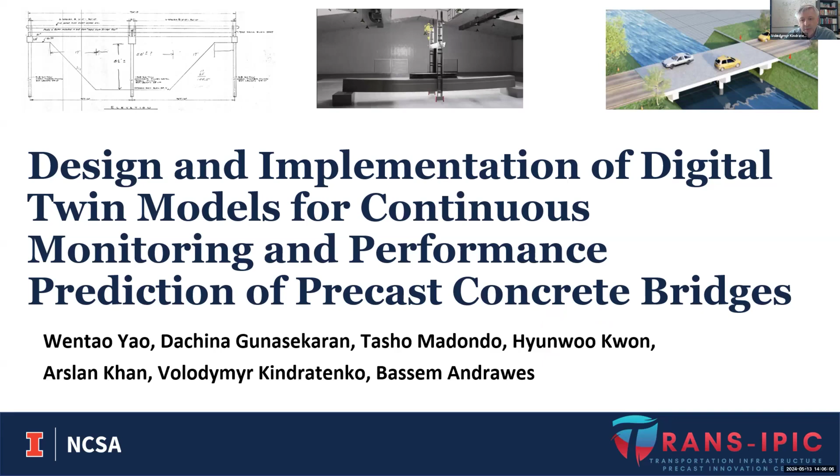I work at NCSA, as Professor Andrawes mentioned. And so this project is on designing and implementing digital twin models for continuous monitoring and performance prediction of precast concrete bridges. And this is really closely related to the work which otherwise is typically carried out in these high performance computing centers, where we are interested in running these complex simulation models on complex computer systems.

I should point out that this is a joint effort. So Professor Andrawes is also a co-principal investigator for this project. And we have a group of very capable and talented students who have been doing quite a bit of work. I should point out specifically Wentao Yao, who works with digital twin models. Dachina from Professor Andrawes' group, who works with actual bridges and actual physical modeling and simulation.

And also Tasho Madondo, who helped quite a bit with modeling, and also Hyunwoo Kwon, who is another student who worked on helping with building the simulations and bringing them into the digital twin models setup. And also Arslan Khan. Arslan is a new postdoc in Professor Andrawes' group, and Arslan came just recently, but he really became a very integral part of this project. He is very knowledgeable and helps students quite a bit to do what they're supposed to do.

Okay, so when we proposed this project, these were kind of our overarching goals. One of them was to design and validate a digital twin model of a precast concrete bridge structure, and also subsequently integrate this model with sensor data which is coming from the real world. And we had some ideas about where that sensor data might be coming from and what we can do with this. But the overarching idea was to merge these two things.

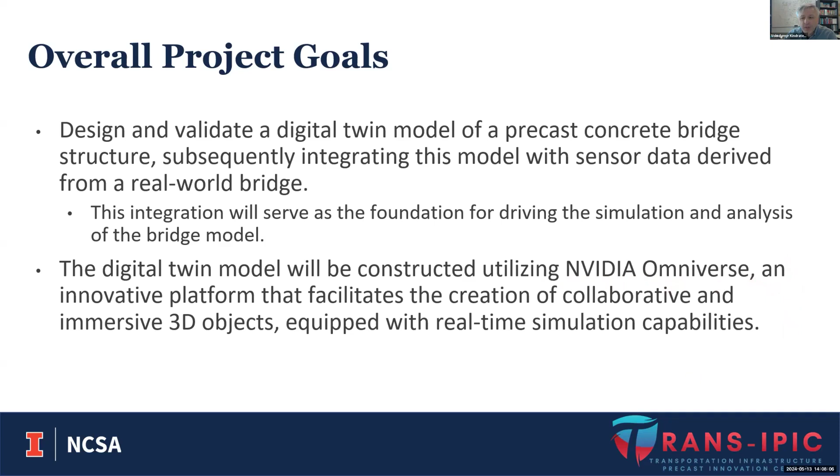And then another idea that we had was that we also wanted to play with this new platform developed by NVIDIA called Omniverse. We heard a lot about capabilities of this platform to enable building digital twin models for very complex processes and systems. And we wanted to investigate how exactly this will work, and if there are any advantages or benefits of this platform compared to other tools that are traditionally used in this space.

So our research plan consisted of essentially three main topics or directions. One of them was essentially to build a digital model. We wanted to explore how to use technical drawings and any sort of documentation available to very quickly build models. And the key idea here was that because these bridges are built from precast parts, there must be some sort of standard set of these precast parts that we can implement, and then we can rapidly assemble real bridges from them.

Another item on the research plan was how to use the NVIDIA Omniverse platform. So how we can bring these precast components into this environment, how we can rapidly assemble something from them, and also how we can connect it to the external world. And presumably the Omniverse environment was supposed to give us the ability to connect with data coming from the real bridges, as well as potentially data coming from simulations or observations of other kinds.

And of course, the bridge analysis and simulation using real-time data. So once this platform is set up, once we develop all these building blocks, how we really link it together with the environmental data, with the data available in the databases, with the simulation data, and how we can build basically a data-driven digital twin model such that it really reflects the real bridge structures. So this was the overarching plan.

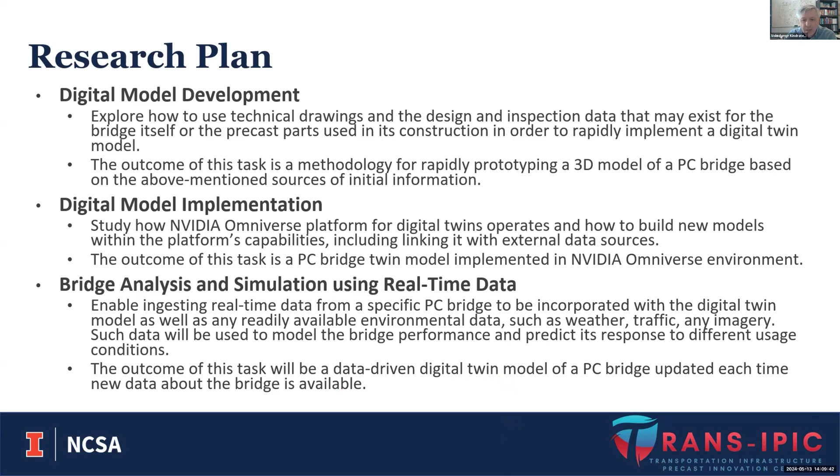A few words about the digital twins. So a digital twin model is a digital representation that simulates a physical object throughout its life cycle. So given a real building or a real bridge or a real object, we build a virtual model. This model would have to have a similar appearance in some sort of a virtual world, but more importantly, it would behave in the same way as the real object.

If something happens to the real object, it would be reflected on the digital twin model so that we can observe it inside of our virtual environment without the need to actually go and inspect the real bridge or real object. And so in the context of bridge monitoring, the digital twin includes basically a virtual model that reflects the real-time data of the bridge's physical structures.

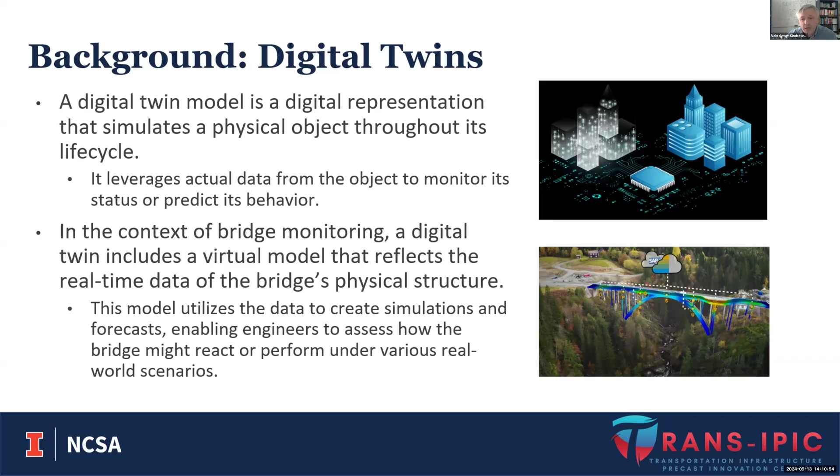If there are some sensors that measure something about the bridge, we want these measurements to be reflected in our digital twin model, and at least the data be examined on the digital twin model. But better yet, if the data can drive the sort of evolution of that model.

A few words about the Omniverse. I already mentioned why we wanted to use Omniverse. This is a new technology that was recently developed by NVIDIA, and it really capitalizes on the best GPU hardware that is available at NCSA in particular. But more importantly, the platform was originally designed as a platform for building digital twin models for all kinds of purposes.

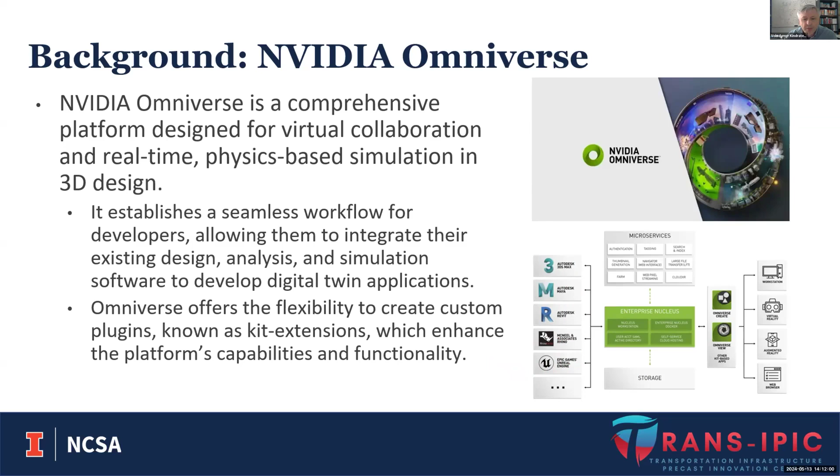The most important part of what it has is the ability to build these plugins that enable to bring in external data, that enable to connect data feeds with the virtual models, that enable to direct or apply changes to the virtual models in response to the real data. And not only real data, but these plugins could also connect to simulations, very accurate physics-based simulations that can also be reflected in this environment and so on. And so that's what's special about this platform. That is kind of an emerging platform in this field.

Okay, so let's talk about our plan, and then the work that we have done as part of that plan. So we started with these drawings that look like this. We got a whole collection of bridge drawings that look like that, and so we spent some time trying to understand what they are. But at the end of the day, all these precast concrete bridges are built out of some sort of well-defined construction pieces, where concrete is poured somewhere else, but they are brought in place at the time of the bridge construction. So these are examples of basic beam components, which we modeled based on these drawings.

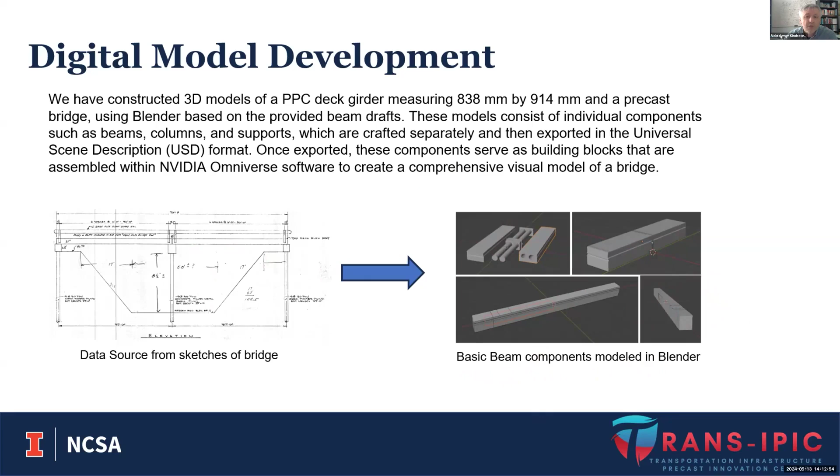So we have to build these models, obviously, but once they are built, we can actually then go and assemble them in our virtual environment to build one or another bridge. So we started with manually building this bridge, where we also applied all this texture just to make it look pretty. But at the end of the day, our goal is to be able to programmatically build these bridges. So for example, we can go to a database that tells us that this bridge consists of so many beams of that size, arranged in this particular configuration, and we want to be able to read that information and programmatically build it on the fly.

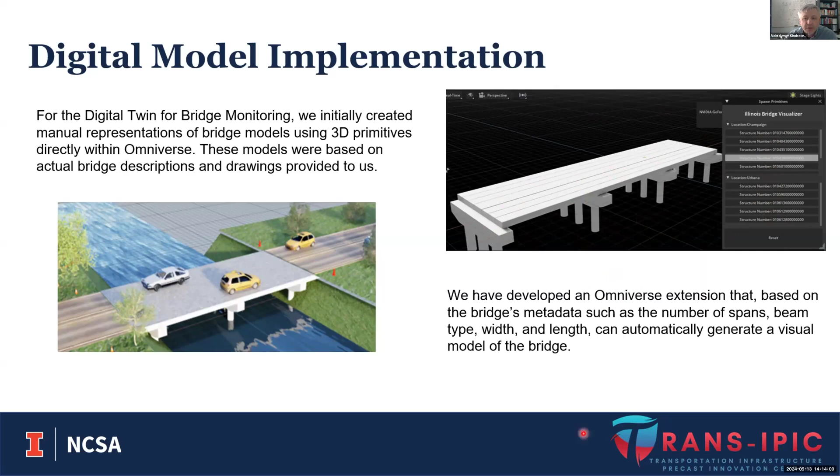Yeah, and so we built the plugin to Omniverse that enables us to query a database with information about bridges, and then we can programmatically pick a bridge, and the actual geometry of that bridge will be assembled on the fly inside this virtual environment. And so that's what we were able to accomplish with the help of the Omniverse environment, just by building these plugins that can read databases and sample bridges.

So once we've done that, we also started to look at how we can incorporate data from other databases. For example, if there is some sort of inspection database where somebody came and looked at the bridge and recorded some values, we wanted to be able to pick up the data from the inspections and visualize it in some ways. And so we found the NBI database, and in that database we found information for different types of performance evaluation and inspection. And we were able to connect to the database for specific regions and pull out this data and show historical plots, as well as any pictures that have been taken from that area of the bridge.

If they are available and stored somewhere, we can also pull them in, and you can visualize them in this virtual environment. So the idea would be that a user of the system can pull out a particular bridge, build a virtual model of this bridge like this, and then go to the relevant databases and pull out the relevant information about the bridge that was collected over time, and visualize it there as well. And so you could kind of do virtual inspection of these structures in your office.

All right, but then the other question was, how can we connect this with real-time data? And actually, where do we get that real-time data? And what is that real-time data? What is it that we could potentially collect?

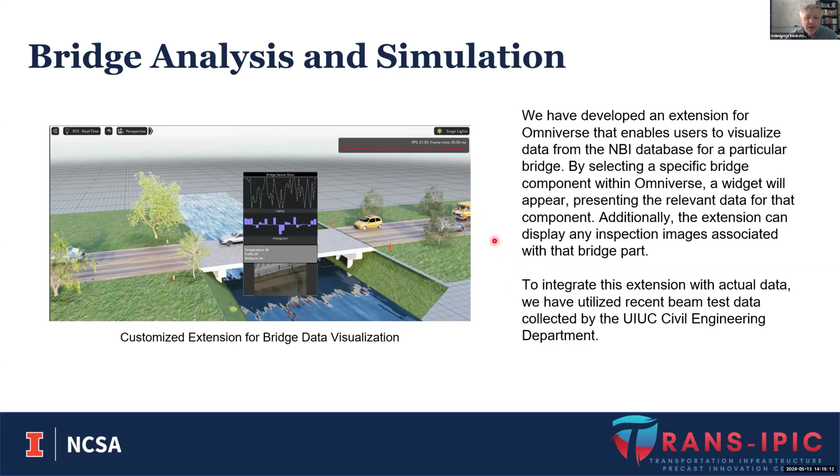So in order to do that, we started to look at how bridges are tested, but more specifically, how these tests are done in the lab environment. And we were lucky that Professor Andrawes' team was preparing to run yet another test of a beam in the lab, and so we decided that we would really like to collect the data during the test and build a digital

twin model of that beam and learn how to integrate the data that comes from this sort of test, but also understand what the data is and how we can use it in our digital twin model for bridges in general, and what else we can do with this data to drive the modeling and simulation tests. And this test took place a little bit more than a month ago, I think.

And this is the stress test where a load is applied to this large beam, and the beam eventually gets bent, cracks develop, and eventually it collapses. And so we set up an additional set of cameras so we can collect some data from this experiment, in addition to the data that is already collected by the team.

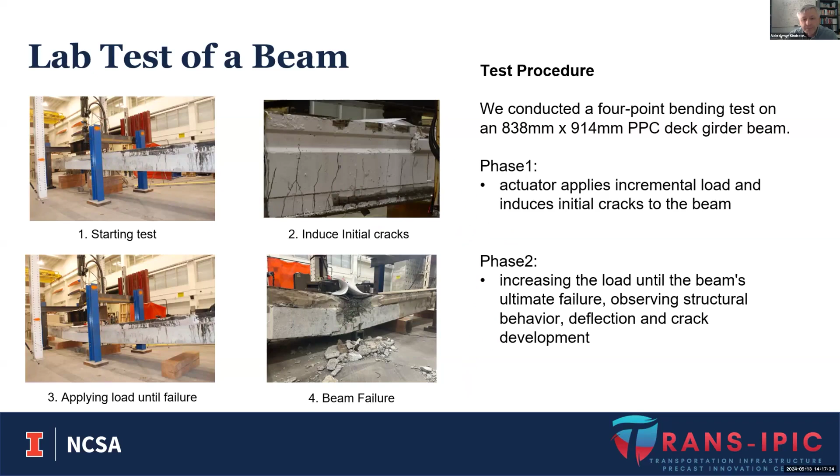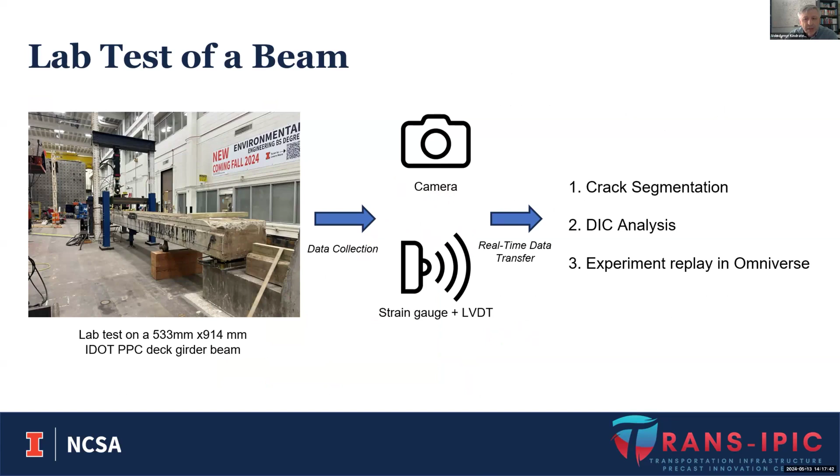And we can then use this data to be reflected in our virtual model. So the data that is collected from our point of view is the data from cameras, and we can extract quite a bit from there. And then there are also other types of data that were collected by the team that could also be used for other purposes.

And eventually, we were able to build a virtual model of the beam in our environment that looks like this. This is a simplified version of the test environment, but the beam actually has all the main characteristics of the actual physical beam. And so there is this virtual load which is applied to it, and there is a deformation that happens here.

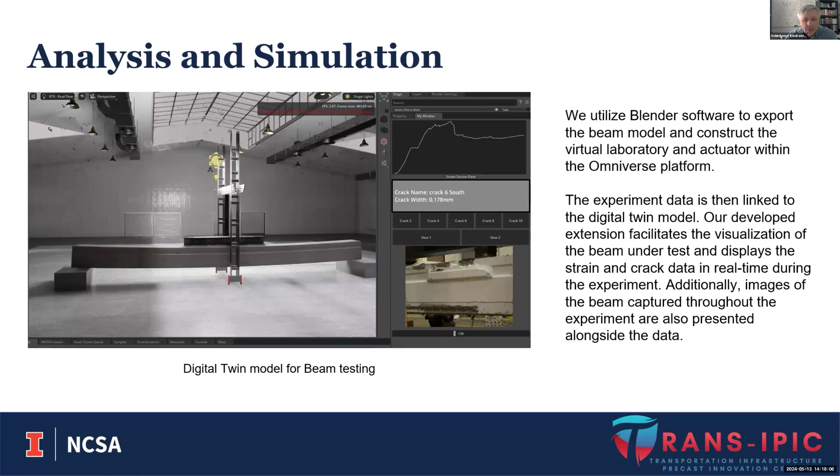And so here, let me go to the next slide. So there is an animation somewhere here. Let me see if it will work. Yeah, there's supposed to be an animation. I don't see it playing, but maybe it will start playing a bit later.

So the idea here is that as the load is applied, there is a deformation, and a user can actually see as a function of time how much load is applied, what the readings of the sensors are, as well as see pictures that were taken. We were taking pictures every 30 seconds. So at any given moment of time, you can see how the actual structure of this beam looks.

And so through this, we were able to enable navigation in time, so the operator or the user of the system can actually go back in time to see what happened before and go forward in time. And so this model is there, and it is working now. So yeah, here we go.

So there is this animation that just started. As you can see, as time goes by and the load is applied, there are some deformations and there are pictures which correspond to that, and so on.

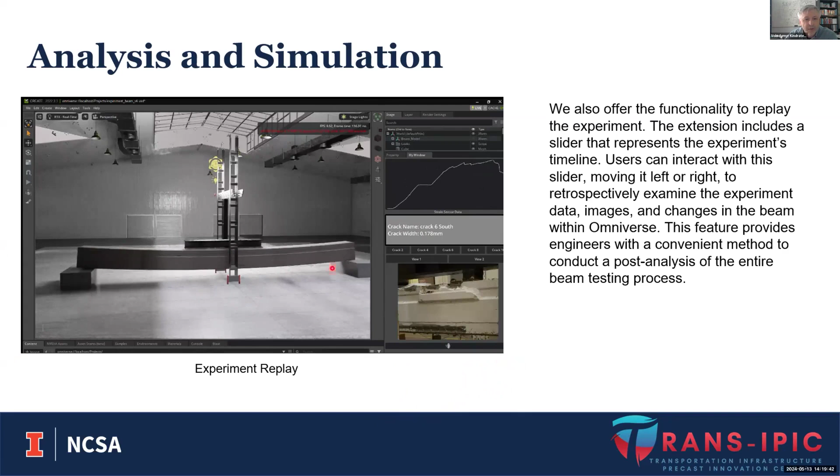Now, this is just a visual representation, and we very quickly understood that the accuracy of this is just some visual resemblance, but it doesn't mean that this deformation happens exactly like it's shown here. So we started to look into how we can actually model this with finite element analysis tools.

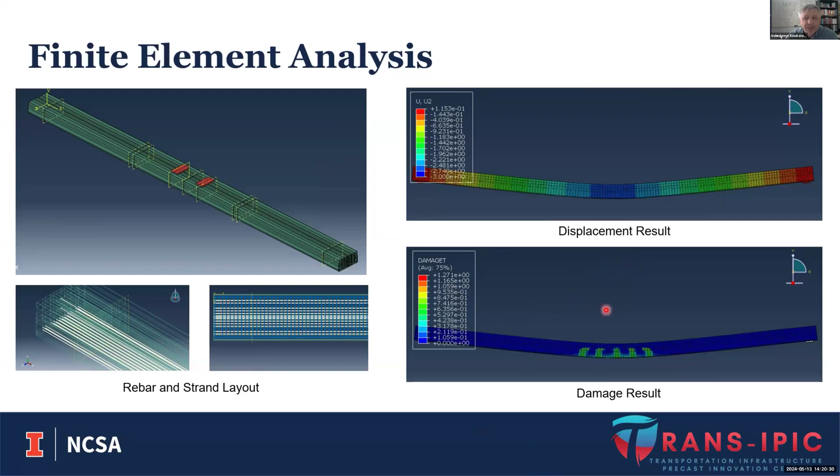So one of our students built a model for this bridge, or for this beam, and then started to apply some forces in a particular location and model this to sort of reproduce the process of the actual deformation in this virtual environment, and then export all these geometries from this tool into our Omniverse environment, so we can actually visualize what really happens there more precisely and more accurately, so we can build a more accurate bending model.

So the simulation was done in Abaqus, and then the geometry was exported into ParaView, and then from ParaView, with the help of plugins available in Omniverse, we were able to bring this geometry back into this virtual environment.

Now, of course, there are some aspects of this that are still somewhat problematic. For example, these finite element method simulations, depending on the accuracy required, are time consuming, so we cannot necessarily run all of this in real time or in the time frames that we are interested in. So there is some more work to be done to get this to work faster.

But anyway, we could bring the actual physics-based simulations into our virtual environment as well, and be able to sort of simulate performance of these structures and visualize this performance in this environment. We also look at the cracks.

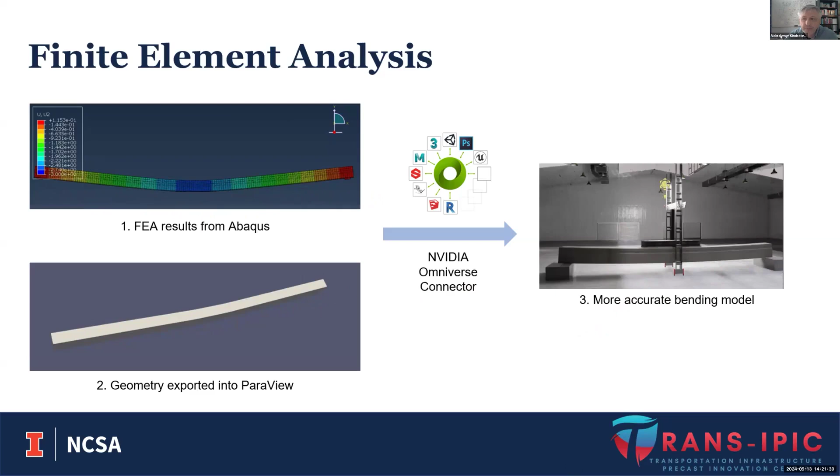This summer, we want to go back and re-evaluate this a little bit more and build the software, or models actually, perhaps machine learning models, that can extract these cracks from the moment they start to form during the experiment. And so we can actually measure the thickness of cracks, their length, and perhaps something about their geometries from the beginning of the experiment, and sort of compute how these cracks behave with higher loads.

And so our idea here is that given the load, we want to get some sort of a model, some sort of an idea how these cracks can be created, but also given the cracks, so taking a picture of an existing beam, we also want to get some ideas about how much load must have been applied to the beam so that this particular type of cracks formed. So we want to use this data to develop models to study this phenomenon both ways.

So I guess there is an animation somewhere here as well. Yeah, these animations are pretty heavy.

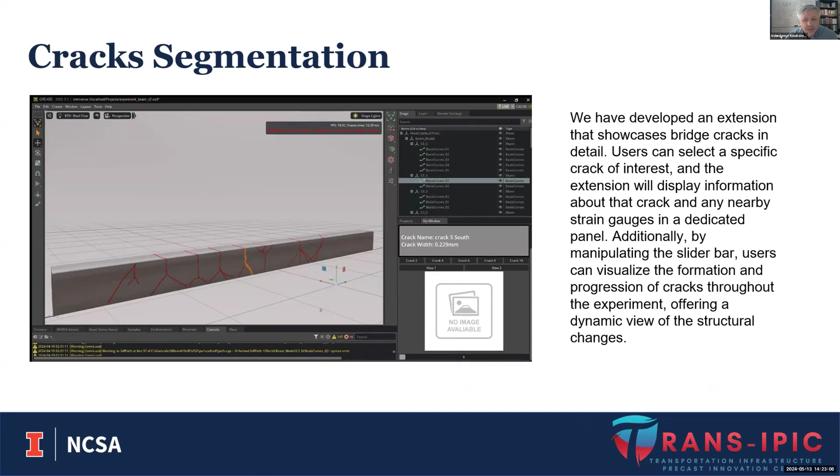Yeah, and so we've been also working on developing this software. So we started to apply some machine learning models that can be used to extract cracks from pictures that look like this. And this is not exactly precise yet. We need to spend more time on developing this software.

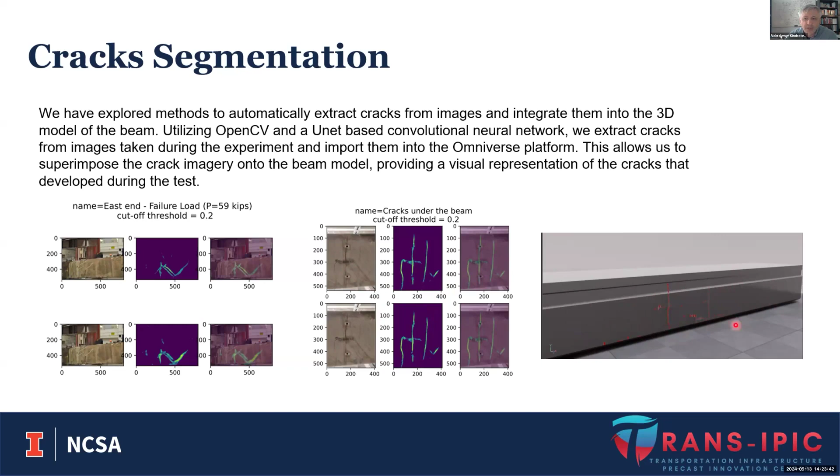But nevertheless, we are able to extract bigger cracks relatively accurately, and we are able to superimpose these cracks on top of these geometries in our Omniverse environment so that they can be visualized. And our goal is eventually to get this to be visualized essentially in real time as the experiment continues. So, with that, this is what we have done.

We investigated different technologies needed to build these virtual models or digital twin models of precast concrete bridges, and we identified the challenges as well as opportunities in building these models and what they can be used for.

So our plans for this summer are to process the data set that we have collected in this past experiment, and build a data set where for each of the pictures that we collected, we can also get all of the measurements of all of the forces that were applied to the beam and any other descriptive information that is available, so that we can establish a connection between the crack propagation and the amount of load applied, and then try to build models for this.

And also, we are interested in spending more time on improving the performance of finite element analysis methods. Perhaps we can look at running these computations on a high-performance computing system, so that we can get results much faster.

And so we could, for example, run a finite element analysis model during the time of this beam test, and if we can predict accurately in real time what is going to happen to the beam, and also be able to visualize this in real time, so that users can observe the virtual experiment in the digital twin model environment while the actual real experiment is taking place, together with the analysis and prediction that is computed on

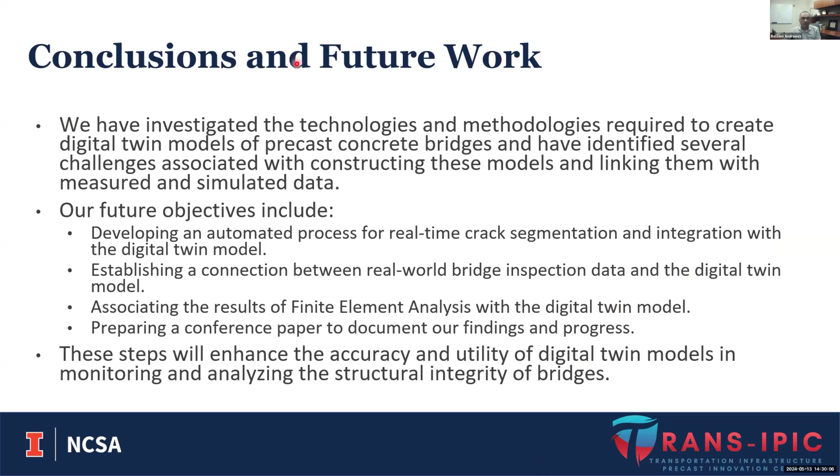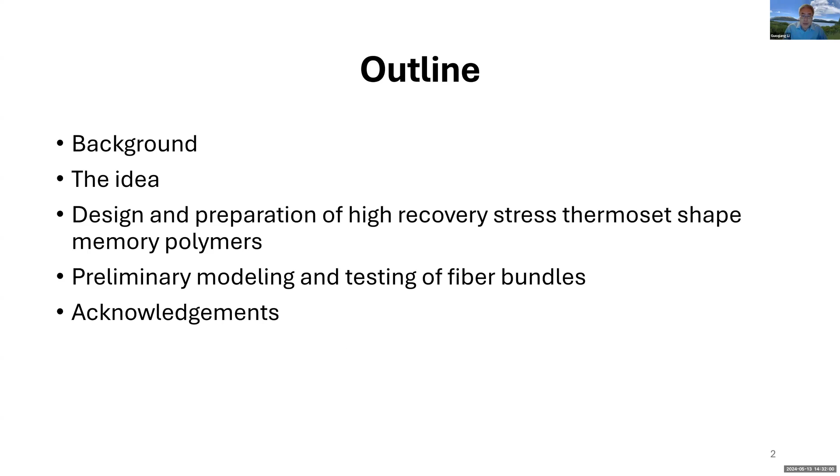Okay, background. You know that fiber reinforced polymer or FRP rebars have been used in repair, rehabilitation, reinforcement, and reconstruction of concrete structures. In the literature, people also call it 4R. We know the advantage of FRP is that they're lighter and also corrosion resistant. And we believe that FRP rebars can be further improved by using smart polymers. So here we are talking about shape memory polymers.

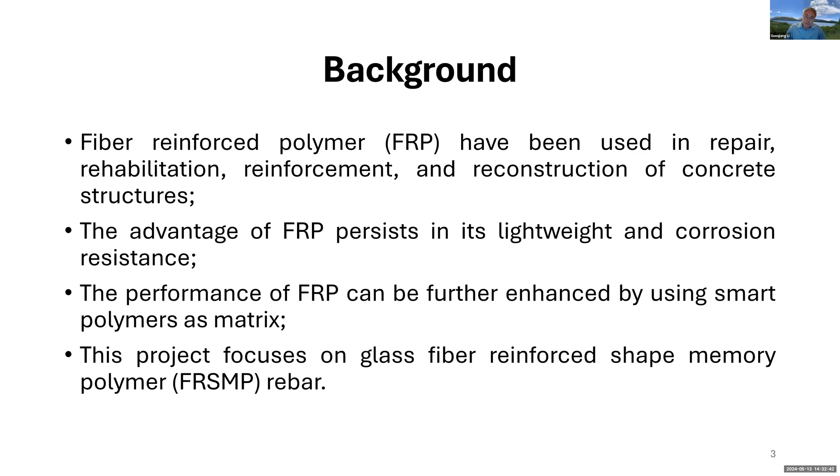Assuming during service you create a crack due to bending or other type of stress. Now, by triggering the shape recovery process, because this initial length of the rebar is after the pre-stressing, this longer rebar tries to go back to the original length, which means the rebar tries to shrink. When it shrinks, it will bring the crack in touch, or at least narrow the crack. So the rebar is not only a load carrying device, but also a functional device to help close cracks. If the cement concrete is self-healable, then the crack can be self-healed. So that's the major idea.

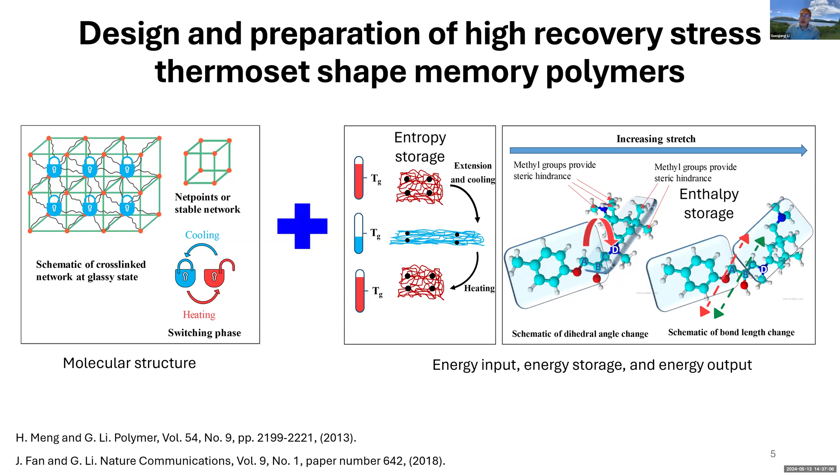Another mechanism is enthalpy storage, which is through chemical bond length change and bond angle change. If you recall the Gibbs free energy equation, both entropy and enthalpy are able to contribute to energy storage. Actually, we rely more on enthalpy storage. The reason is that in the past, people basically relied on entropy, and the recovery stress is very limited. So we proposed the idea of enthalpy storage, and then we started to make new polymer networks. Here I show you one of them.

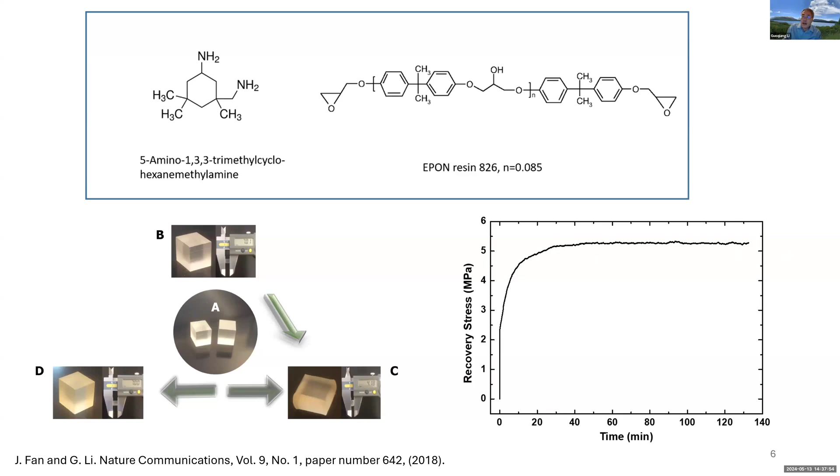This cross-linker and this monomer, when they form chemical cross-links, make a new thermoset shape memory polymer. Here we are showing the recovery stress testing. You can see that after about 6% tensile programming or tensile pre-stressing, we have about 5 MPa recovery stress. If you just depend on entropy storage, the stress will usually be less than 1 MPa.

So we also tried to see if this idea is universal or not. So basically what we did is that we used molecular dynamics simulation, and then we also used solid mechanics modeling, and we compared the modeling result with the experimental result. We found that yes, this idea is correct. The bond length change and bond angle change indeed can store the input energy.

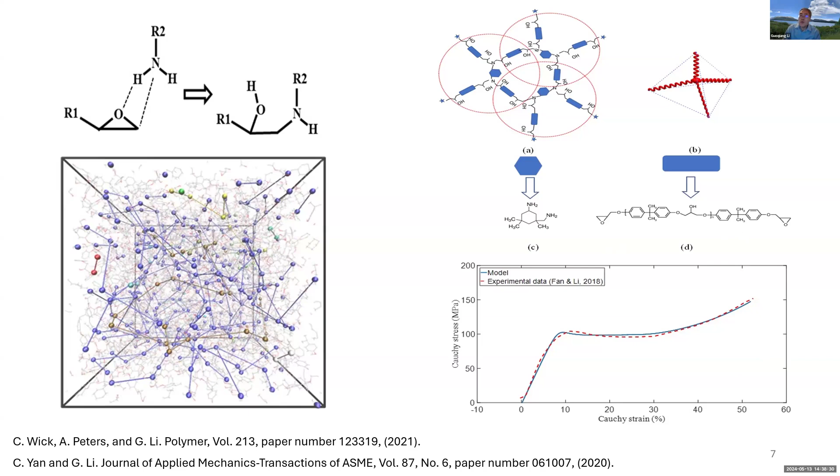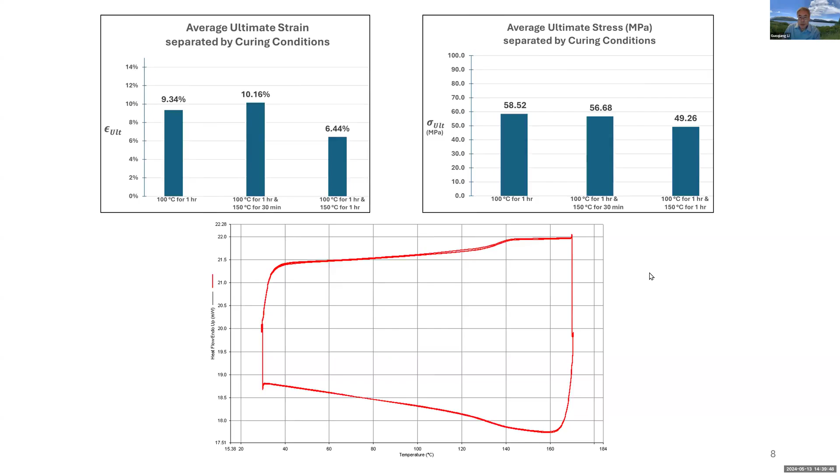Okay, once we know we have a good polymer, the other side is that we try to find good matchable fibers. Okay, as you already know, for lots of synthetic fibers like glass fibers, carbon fibers, their tensile fracture strain is very low. For example, glass fibers usually at about 3 to 5% will fracture. Okay, you can see that in order to input more energy, the fiber during the pre-stressing process cannot be fractured. So we're trying to see, can we further increase the fiber bundle fracture strain?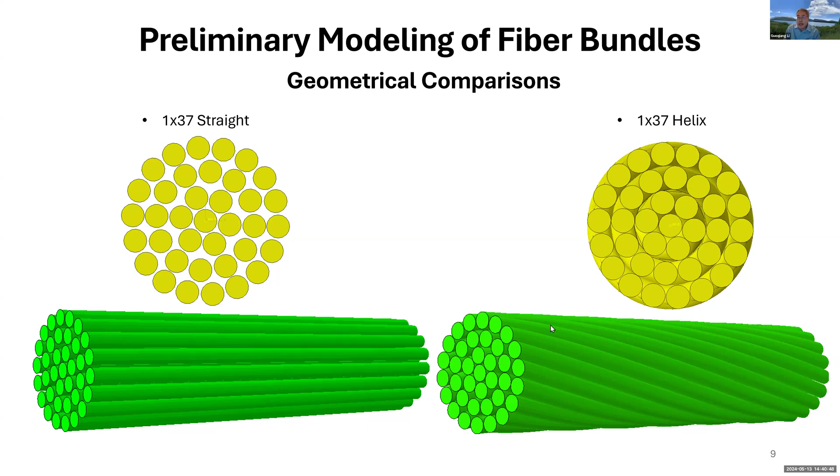Okay, so if you just use straight fibers, of course, you have no way to change it because it's a material property, right? So we're trying to see if you change the configuration of the fibers. Okay, so here you see that we have two bundles. One is a straight fiber bundle, another is a helical configuration. And then we did finite element modeling, and we tried to compare. So here is the normal stress comparison. So basically you can see the normal stress in the helical fiber is 66 times lower than the straight fibers. So definitely this is a good sign, right?

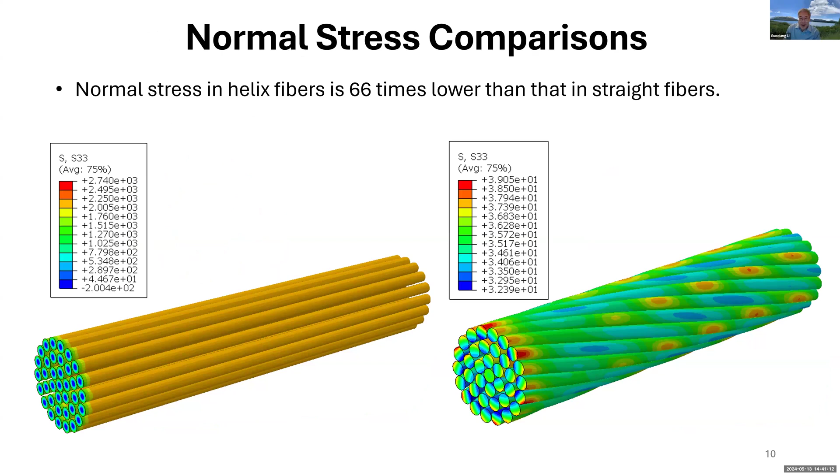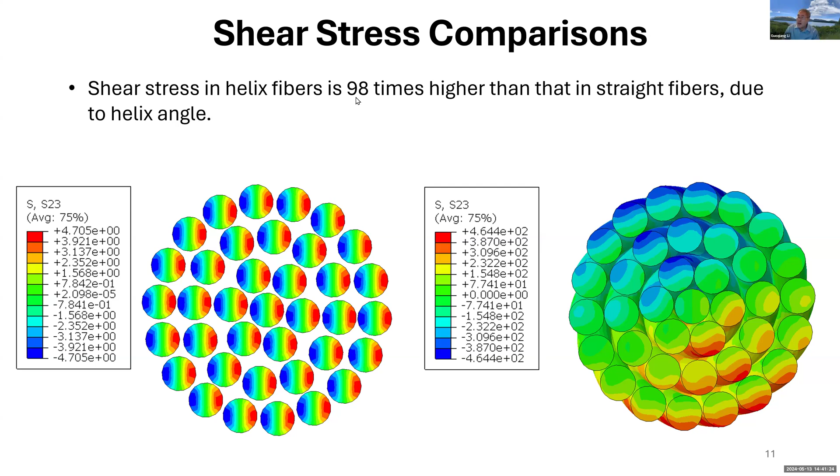The stress is smaller. And then if you compare the shear stress, of course, these helical fiber bundles will have a much, much higher, 98 times higher than the straight fibers, which definitely is understandable, okay? And then if you compare the maximum principal stress, again, this time the helical fiber is 7 times lower than the straight fibers. Again, this is a good sign to use this new configuration, okay?

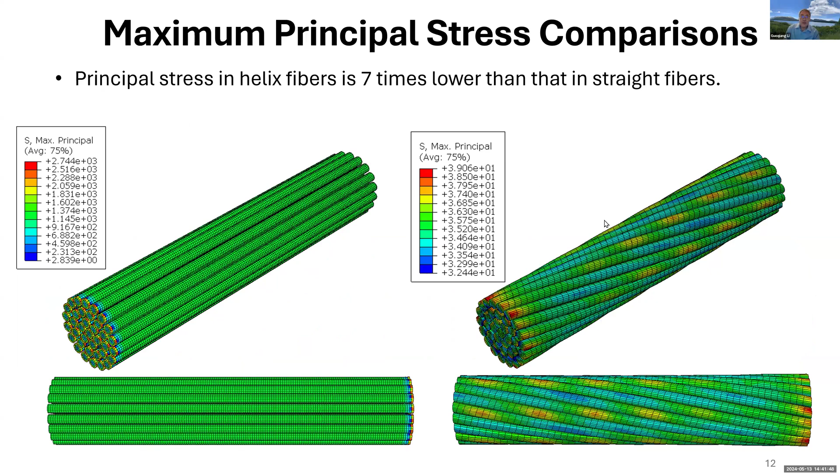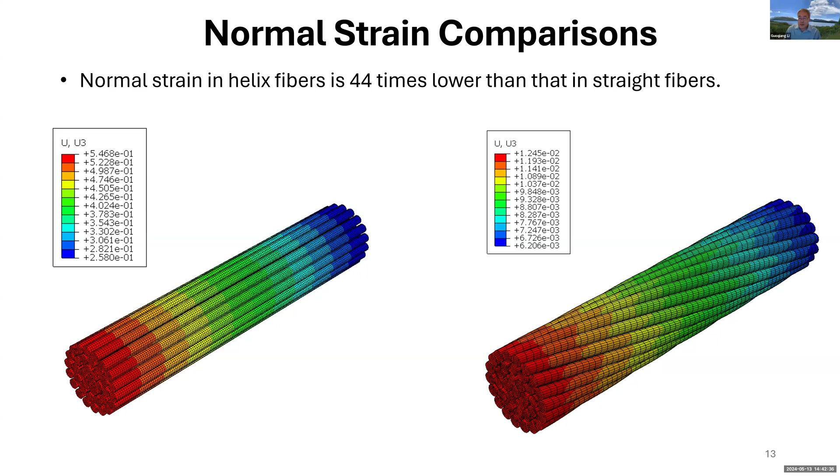Okay, of course, here is the comparison of the shear strain. Understandably, the shear strain of the helical fiber will be much higher, okay?

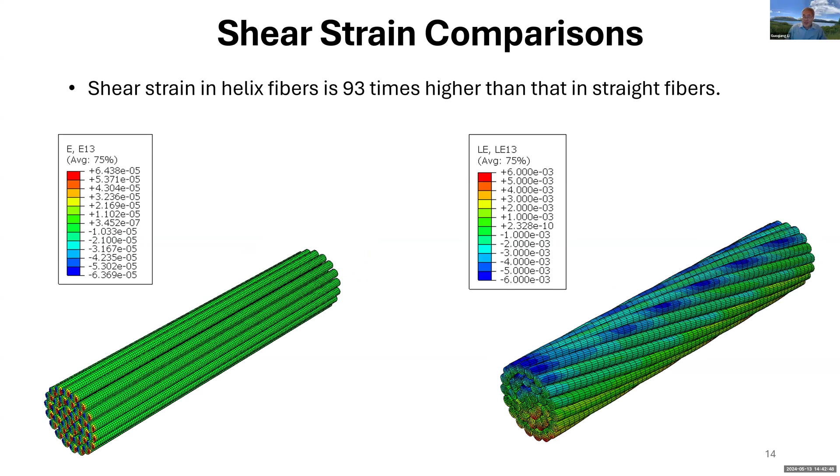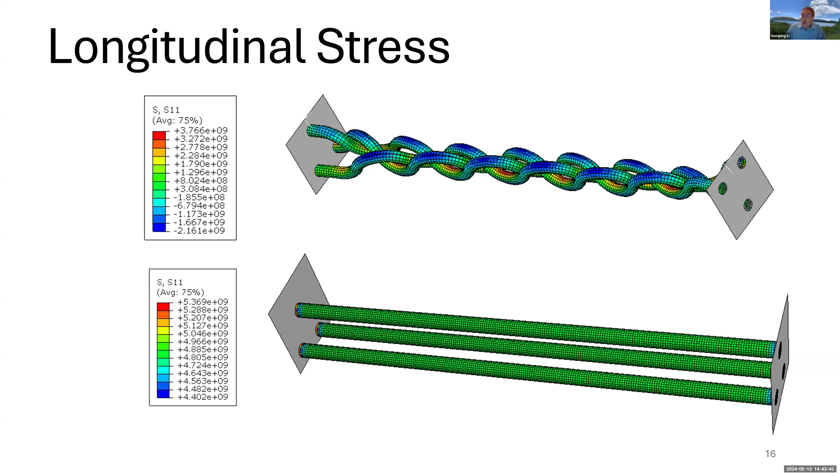The result shows that if you compare the longitudinal tensile stress for the braided fibers, with everything the same, the same loading, same boundary conditions, same materials, the maximum tensile stress is about 1.5 times lower than the straight fibers. Again, this is something that deserves expectation.

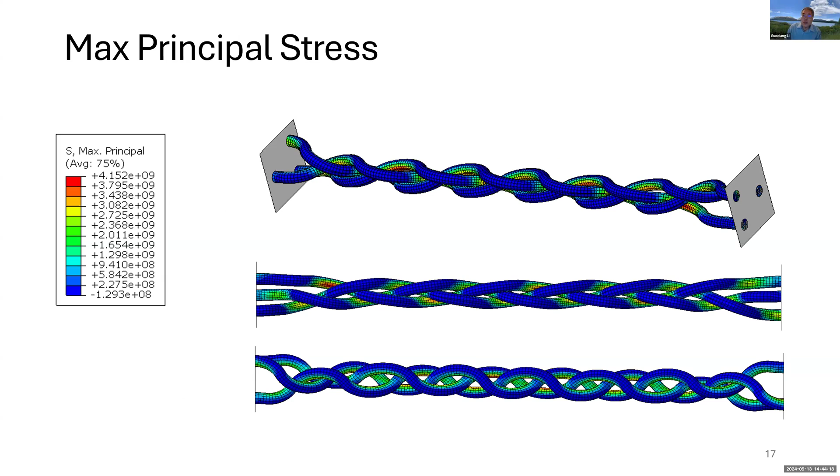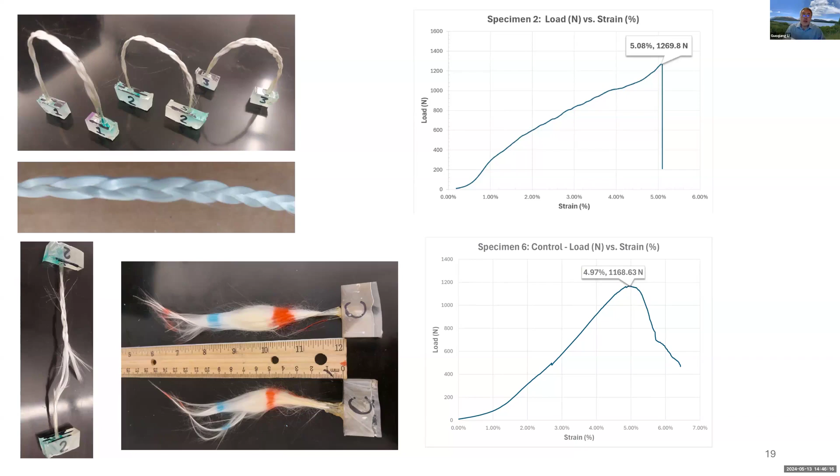So our next stage study in the summer will focus on more configurations and more testing, and also trying to convert these fiber bundles into real rebars.

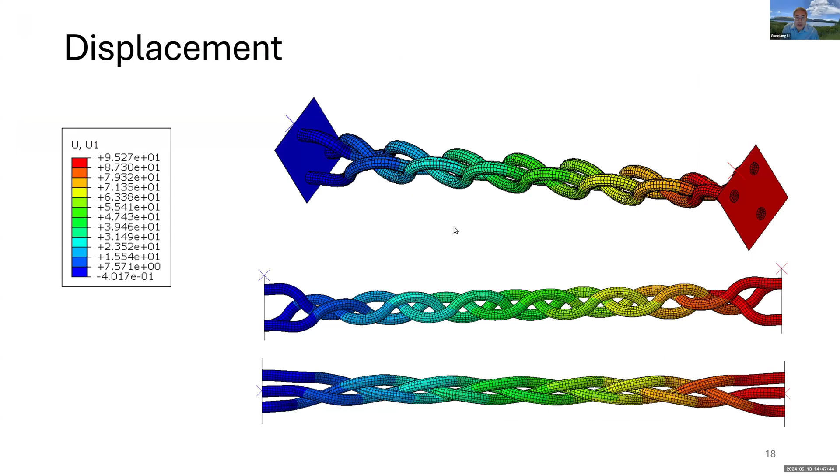Yes, just the expectation. Before I go to that step, the first question we need to solve is the interfacial bonding between the FRP rebar and the concrete, because thermoset polymers usually have very poor interfacial bonding. That's why when we prepare the conventional polymer-based FRP rebar, we try to make some grooves to improve the surface roughness so that they have some interlocking with concrete.

As for your real question, will that affect the behavior of the concrete? This is something that needs careful study. For example, when the rebar recovers, let's say we have 5% recovery strain, during this recovery process the concrete may be subjected to some tensile stress. Will the concrete survive this tension or not? This definitely is a question that needs to be answered.

I hope that once we are able to prepare this type of rebar and do some small scale testing, we will be better able to answer this question. Our final goal is to make larger scale rebars and test real larger scale concrete beams. However, I do believe your question is very important, and I will keep it in mind. One, interfacial bonding. Another, during the recovery process, will this type of shrinkage cause further fracture in the concrete? Thank you.